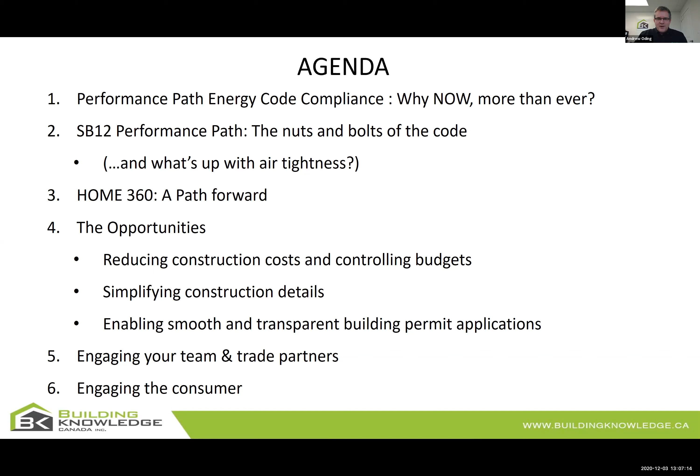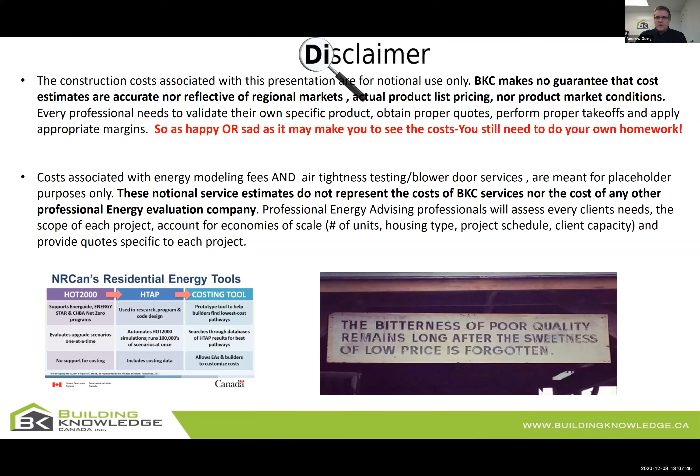So I always have to have a little bit of a caveat sometimes in these sessions. So just real quick, a little bit of a disclaimer. Number one, any of the construction costs we share with you today are notional. So as happy or sad as you are to see some of these costs, you've got to go do your own homework. The costs you see today are not representational of any specific builder cost. Again, they're things we've gained from our experience, and we have also used the Natural Resources Canada builder CBAT tool, cost benefit analysis tool, to do some of the costing, and that's a tool that we've often used with our builders.

So you all know what it's like. We don't need to tell you how things are. We've got construction costs that have gone up exponentially. We've seen costs of somewhere in 10 to 15,000 or more per home, just simply based on your panel and your wood type things. We've seen that the codes are getting incredibly complex. Our building permit applications are complicated for everyone, and our consumer expectations are growing absolutely exponentially. And that's, of course, thanks to all those great television shows on HGTV where perfect homes are built in 36.5 minutes minus commercial time by people in clean brown overalls and clean white shirts.

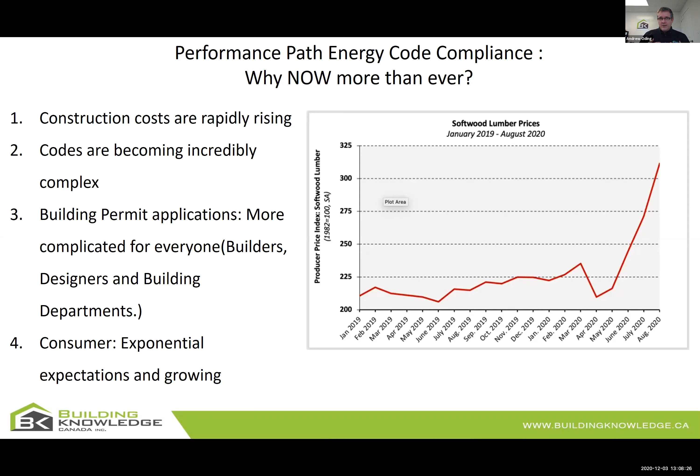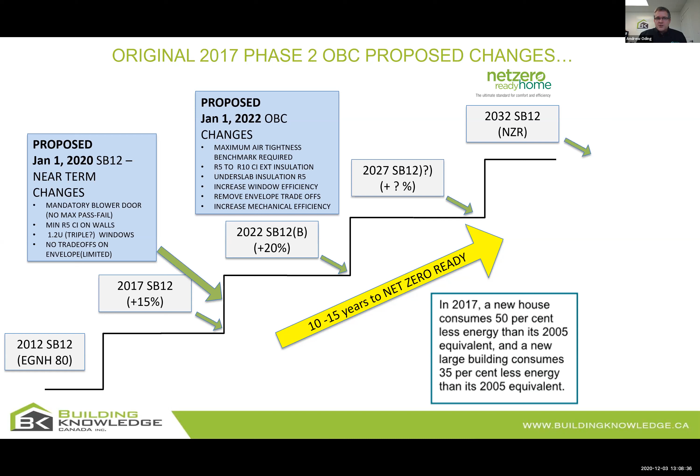So many of you would have remembered slides like this from 2016, 2017, and that was back in the day when it looked like the province notionally was going to be headed towards net zero, and there were these proposed changes. We all know that that is no longer the case. We know that for now, when it comes to the SB-12, there are no current changes tabled between 2019 and at least 2021. So you're good going into the next year when it comes to the SB-12.

The thing you need to understand, though, is that the Ministry of Municipal Affairs and Housing has embarked on a harmonization exercise with the other provinces, and they are looking at this thing called the Tiered 2020 National Building Code, which for your part would be Part 9. A lot of work has to be done yet. There is nothing about this that is a done deal. We would encourage you, particularly as builders and industry folks, get a hold of the Ontario Home Builders committee and get involved. It's one thing to sit back and let things happen, and then either we're happy or we complain about it later on. But the reality is you can get involved now and you can affect change for the better.

So we know where this tiered building code comes from. We know that it suggested that at some point we're going to have this national code that's going to lead towards net zero energy ready homes. One of the things we need to understand, and again, this is context setting, is that this national tiered energy code is about energy. It's not about carbon, and it's energy source neutral. It's not about electrifying the grid.

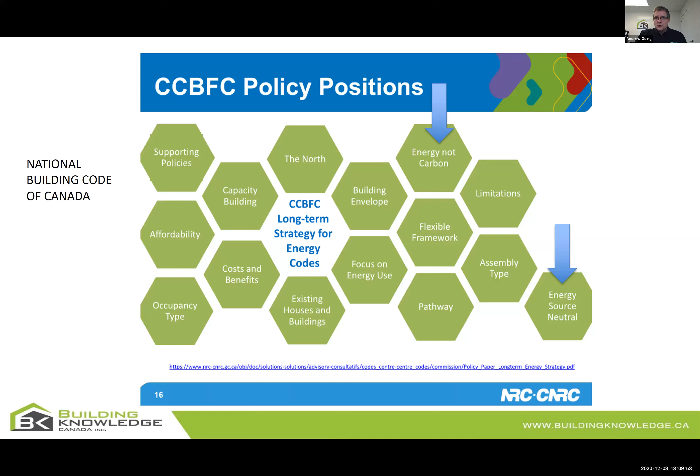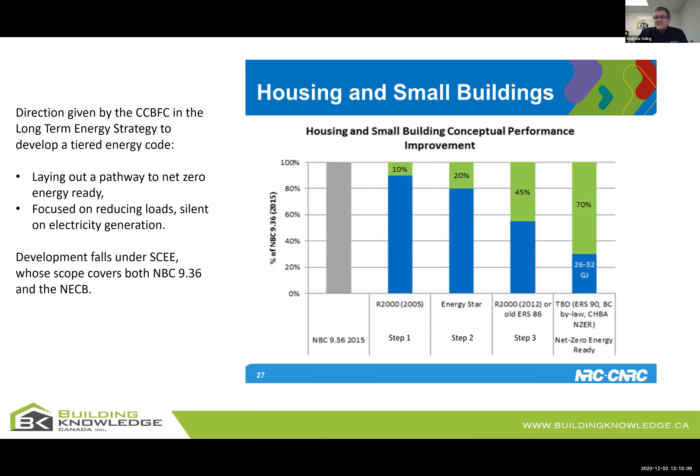Notionally, what it speaks to is, when it comes to houses and buildings, about a 70% reduction at the end of the day versus the original 2015 NBC, or what I would say would be about since the early days of the SB-12. One thing to understand is this National Tiered Energy Code is significantly different than the British Columbia STEP Code. There is no mandatory airtightness testing. There is, in fact, a prescriptive path, so you don't need to do energy modeling.

If you don't want to. So again, be careful of the myths, be careful of the things you hear on the street or in the industry, get the real facts.

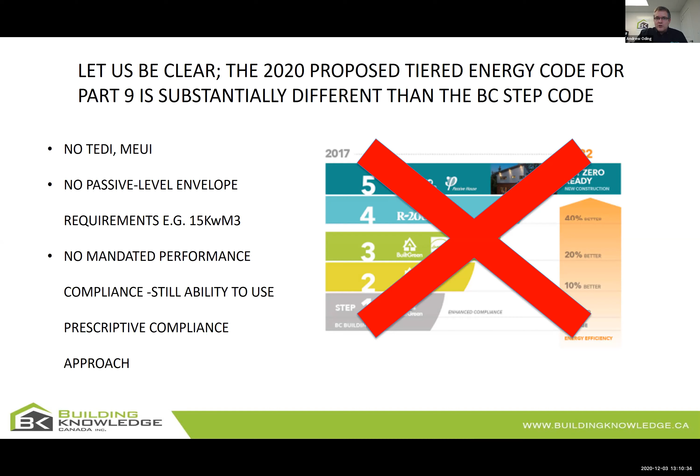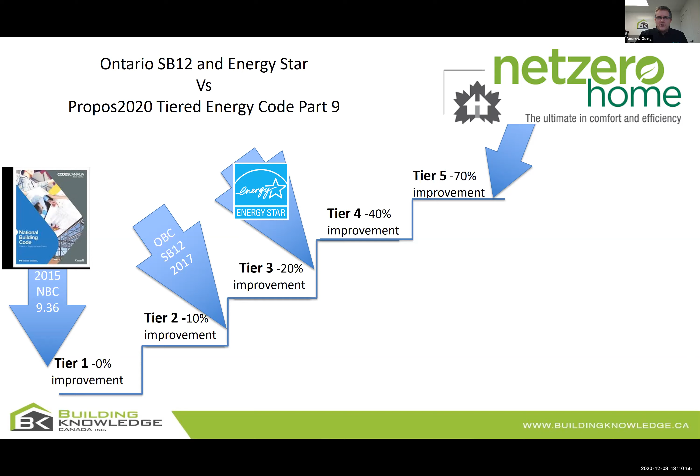What does the tiered energy code mean for you as a builder? Right now in Ontario, for instance, the SB-12 in Ontario notionally is approximately around tier 2 already. Those of you that are doing Energy Star are somewhere around tier 3. And those of you that are involved with net zero ready, net zero homes, you would be up around the tier 5.

A couple things just to set the target, because as we talk today, you're going to want to reflect on this to understand what you need to do to plan as a builder, because some of the things we're talking about today, you're not going to want to go out and do tomorrow. This is about a 1, 5, 10-year plan on how to move forward and why performance is really going to be the key to your future.

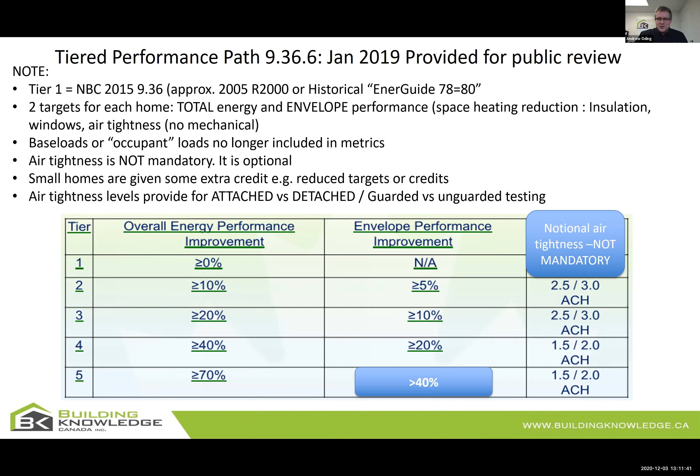A couple things about this tiered energy code. Again, air tightness is not mandatory. There are credits for small homes, so that's not denoted on this slide. There are 2 different metrics. One is an overall energy efficiency performance target, and the other is an envelope. So in other words, you can't just build a shell and put 20 acres of photovoltaics on the roof and call yourself good.

The other thing too is there are 3 ways to meet this, or will be 3 ways to meet this. One is prescriptive, pick your points like Energy Star, EnerGuide for new homes. You can use that if you want, or you can use any third-party energy modeling software you want, as long as it complies with 9.36.5 of the National Building Code and is aligned with Canadian codes and reference standards. So there you go. So it's complicated. You've got choices, you've got alternatives, you've got options.

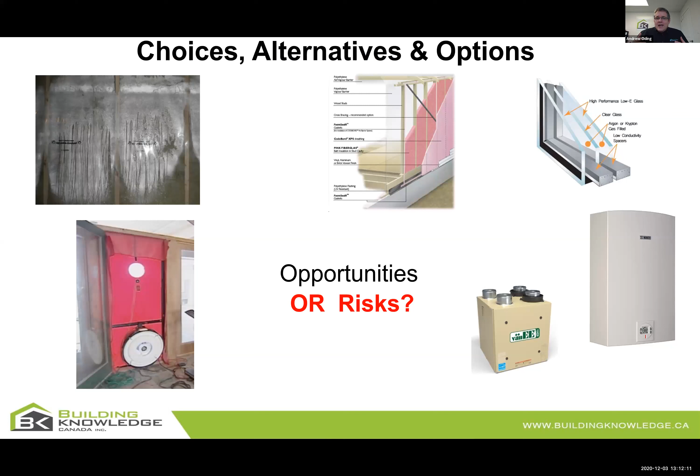Here's the problem. There are opportunities, but there's a lot of risks. And you have to be careful about what you choose in the name of energy efficiency, or you will end up with unintended consequences. We often say to our clients these days and others, if you are not ready, if you're not prepared to actually drain the rain on your envelope better than what you're doing today, in other words, flashing windows and doors, don't put a stitch of more insulation in your walls.

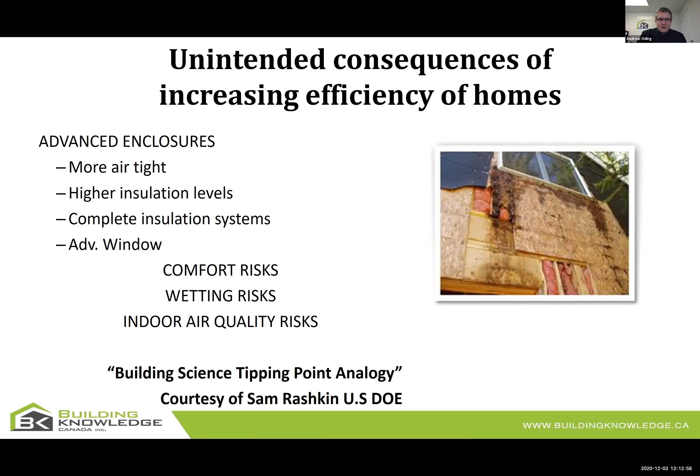Some of the reason I speak to this is just my background as a builder, and then growing up at an early age back in the 1970s when we had an oil embargo. And we had a crisis, and across Canada and in the US both, we had this drive to make homes efficient. And what happened was we had some of the single biggest envelope building failures that came out of that drive to insulate. We had the Canadian Home Insulation Program. We put insulation in and it caused attic rain.

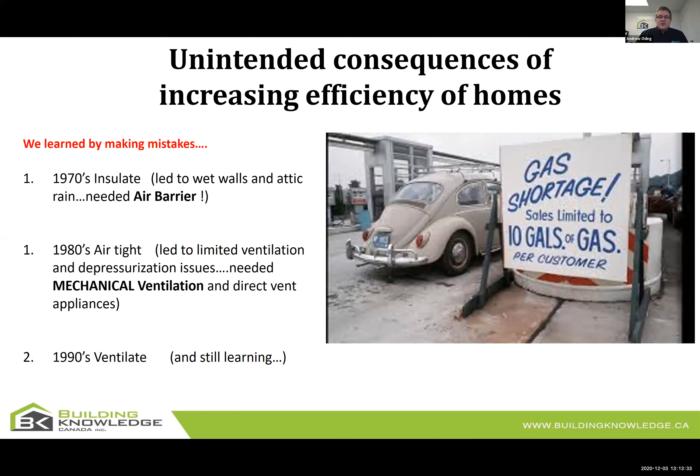So we pulled it out and put in an air barrier. We learned that again in the 1980s, great, you're airtight, but now you need mechanical ventilation. And then finally, we got that into the code in the 1990s, and we're still learning. So again, be very careful about making changes in the name of energy efficiency without understanding the implications of building science.

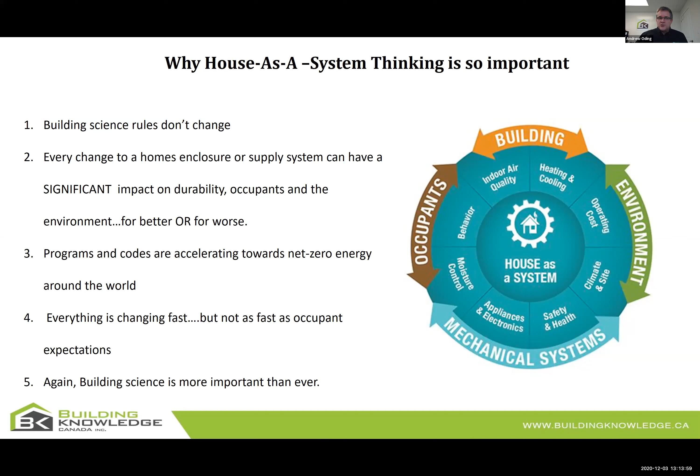So just notionally, use house as a system. It's a Canadian concept. It's been around for years. It's a very simple concept that one change in one element of the home is going to affect another for the better or for the worse. And again, be careful when we have programs and codes accelerating so quickly, unless we can use building science.

The other thing too we do have to understand is that the energy versus carbon, the choices are very complex. Right now we're talking about energy, but folks, the long-term gain is the reduction in carbon. Chris Magwood, a good friend of ours, Chris is doing some phenomenal work at the Endeavour Centre. Go look him up. He's doing a lot of studies right now.

He's developing a carbon tool that he's helping others like ourselves learn how to use, so we can actually look at embedded carbon or embodied carbon on a home. A couple things to keep in mind. If you're not careful, you can take a passive home or a net zero energy home, stuff lots of insulation in with fancy mechanicals, but the reality is the home will have to operate for 400 years to offset the embodied energy that went into those materials.

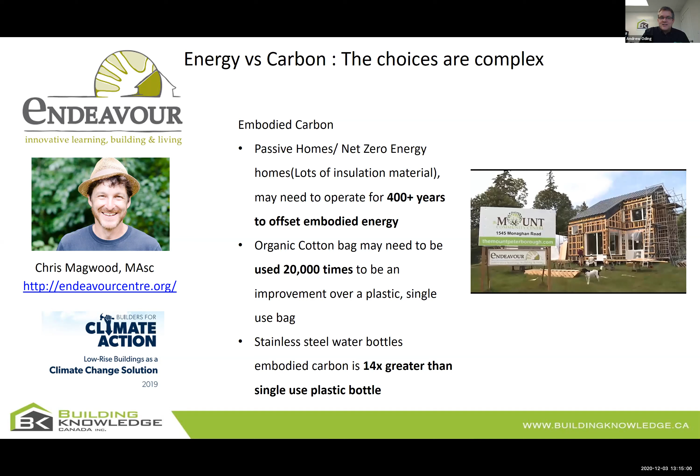You know, it's like the old story Chris tells, the organic cotton bag. It sounds great, you feel green. The problem is it needs to be used 20,000 times to be an improvement over a plastic single-use bag. So again, some of these things we do have to be careful of. And when we look at total global emissions, the embodied carbon almost matches the operational carbon.

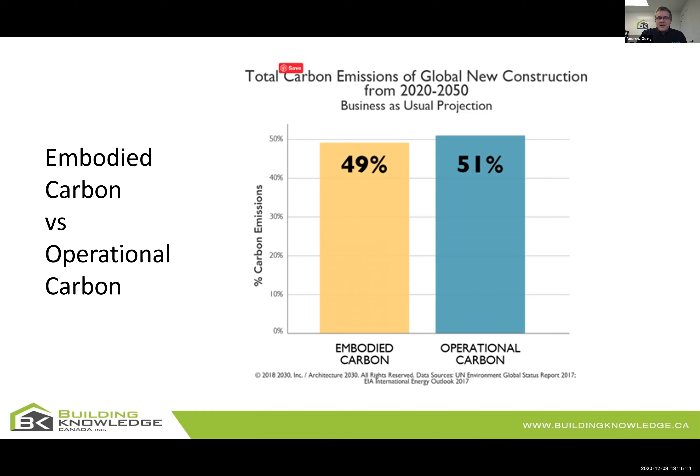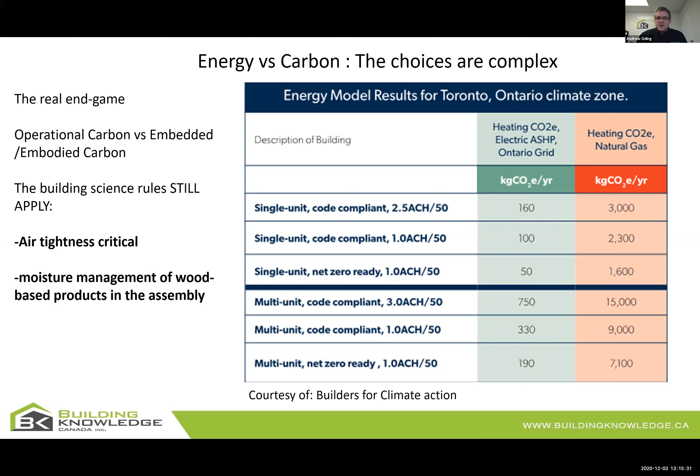Now, that said, the building science still stays the same. At the end of the day, even when we move beyond energy into carbon, you're still going to find that things like air tightness are still incredibly impactful on lowering carbon. And you're also still going to need to be very careful about moisture control in walls and dew point, because you likely will be using more wood-based products or things like that.

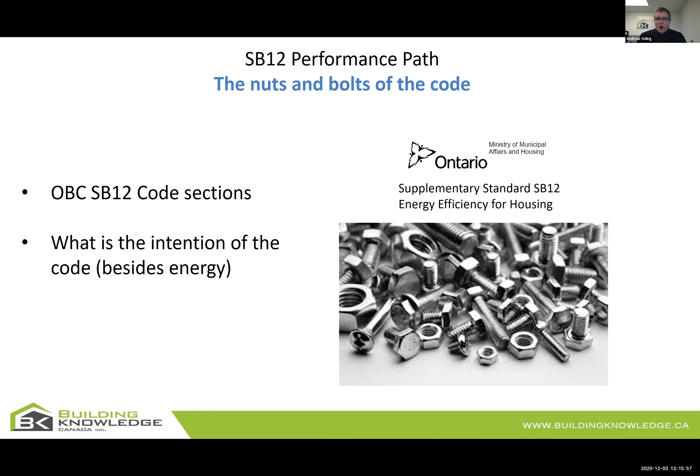Okay, let's talk about the building code, the nuts and the bolts. We're going to talk about the SB-12 code sections, and we're going to talk about what is the intention of the code besides energy. Because remember, before there was energy in the building code, there are life safety standards. In other words, we cannot do things to homes that will harm the occupant or put them in a position of having health implications.

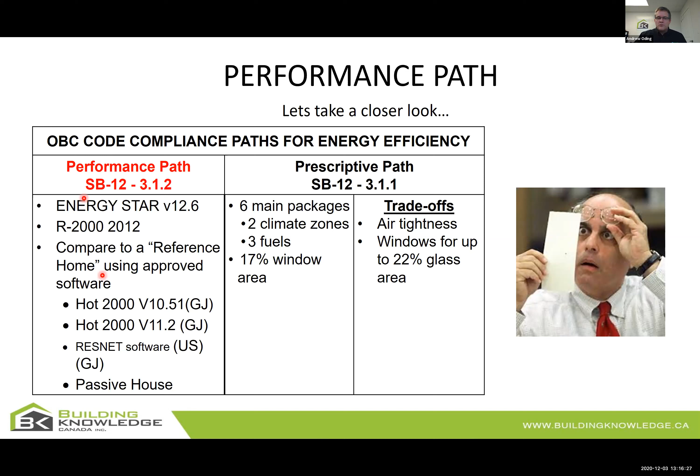So here's what we have in the SB-12. We have the 3.1.1, which is in fact the prescriptive part of the building code. We today are going to be talking about 3.1.2, which is the performance. And within performance, you have the programs. The only volunteer programs recognized under the Ontario Building Code are in fact Energy Star and R2000. And then you have the modeling protocol to do the reference modeling and some of the softwares that you can use, and we'll talk about that later on.

So the Ministry of Municipal Affairs and Housing, I borrowed this slide from a couple of years ago when they came out with the 2017 reg, and I thought it was very informative. They shared with the industry that there were three things they were trying to do with the SB-12: preserve and reinforce the envelope, encourage air tightness and blower door, and prepare the industry for movement towards net zero like housing.

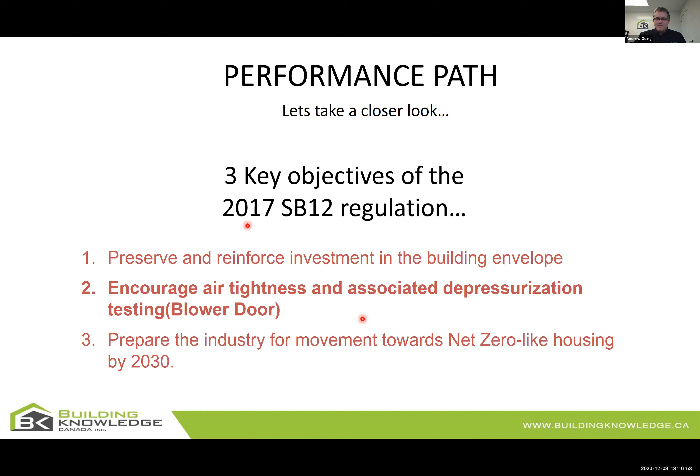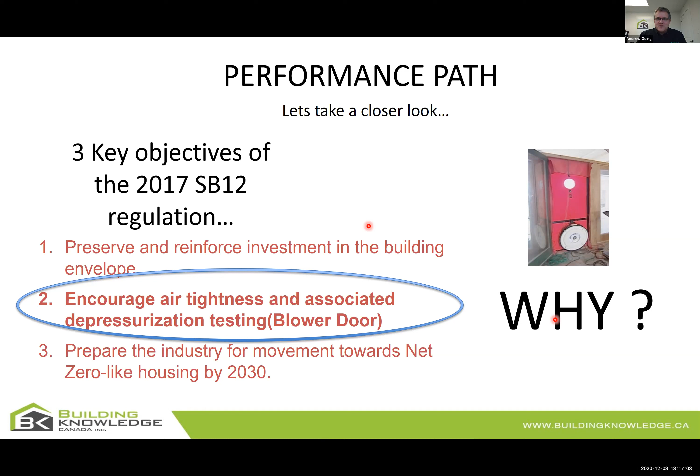What I want to do is focus on this one. Why did the regulators, why is it important from a building science standpoint, from a health safety standpoint, that air tightness was starting to be encouraged under our SB-12? So I'm going to show you. I'm going to send you these slides, but I'd like you to read this. This is the explanation of why air barriers are in our building code.

And here's the problem, folks. Today, when we talk about air tightness and blower doors, we all get caught up in it's energy efficient and it lowers the energy, and it does. But that's not why we have air barriers in the building code. The reason we have air barriers in the building code is because air leakage, only second to rainwater, is the #2 destroyer of homes in Canada.

A week and a half ago, I pulled a bunch of mushy wood out of a house that I had constructed almost 20 years ago. And a lot of it was due to poor air barriers. We see this happening in attics. We do forensics. We see attic rain, and it's because of poor air barriers, not lack of venting. And remember, the reason air barriers went into the codes in the early 1980s, late 1980s, was because we couldn't let moisture get into the envelope.

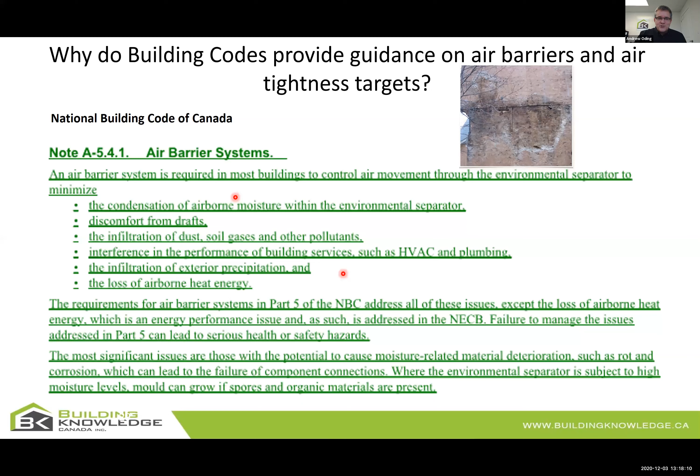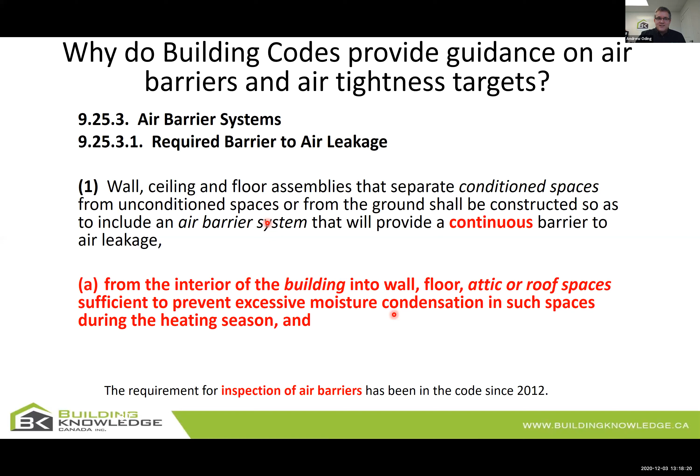Here's the description in your building code. Here's the reason why we have to have air barriers: to prevent excessive moisture condensation in such spaces during the heating season. This is what happens when you don't have good air barriers. Again, I don't think I need to preach to the choir. We all get it. And folks, we are seeing it happen in a rush to make highly insulated envelopes, but we're not tightening the building envelope down for air tightness.

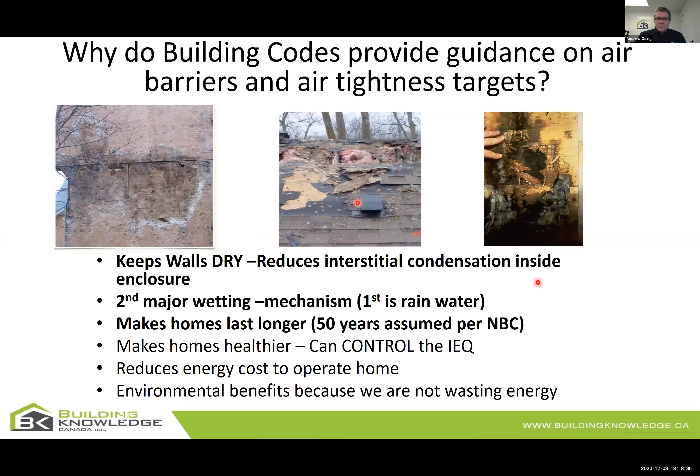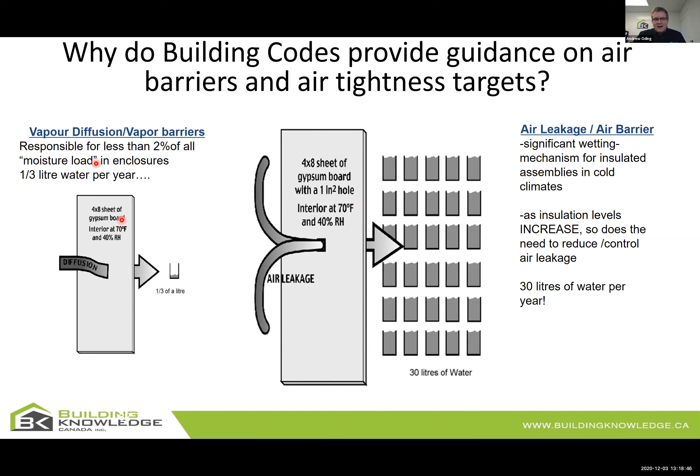The big one that wets walls is in fact air leakage. Now, here's what I call the forgotten part of the SB-12. Many people have forgotten that this was actually in the prescriptive section. And this was where the Ministry of Municipal Affairs and Housing said, you know what? We need to encourage air tightness.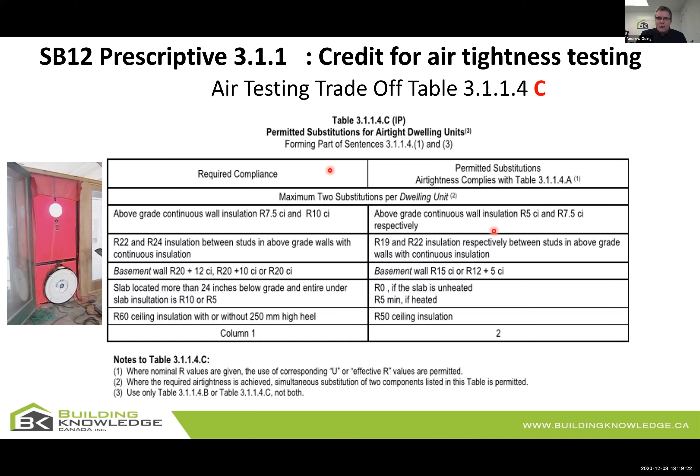In fact, without doing performance or energy modeling, if you just simply air test the home and meet 2.5, you can start to degrade or pull down or optimize other elements of the home, because air tightness is more impactful and more helpful. You'll see there were things like this. Just by doing an air tightness and meeting 2.5, you could reduce furnace efficiency and you could reduce basement insulation.

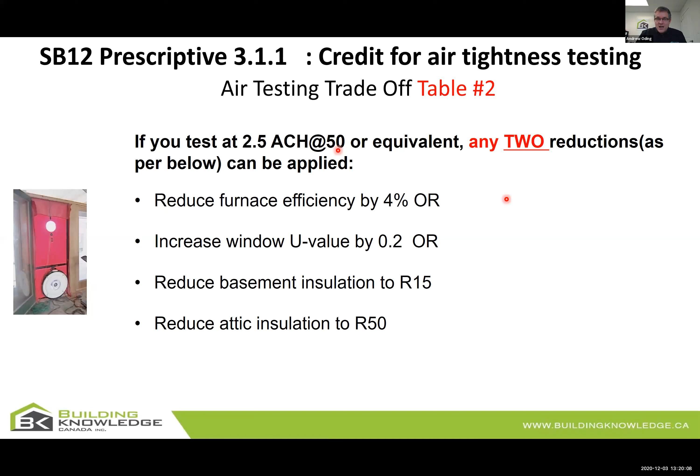How useful is this? Well, go and ask any architect or designer how easy it is to design a thin, narrow townhome and to have to fit a stair next to a common wall and get R20 continuous between the stair hole and the wall, when you already are limited between the stair hole and the garage wall by limiting distance. That's a big deal. We've seen builders have to go in and put spray foam there just to get their R values, and that's a design flaw. So what difference does it make if we can actually lower the amount of insulation and it has limited to no impact on the amount of energy that's lost, but it allows the design to take place?

Again, this is in the prescriptive part of the building code, 3.1.1. It's actually identified on the EEDS form for prescriptive. It simply needs to be acknowledged on the EEDS form. You simply need a blower door test when it's done to be validated by a company like ours or a good registered energy advisor, and you're done.

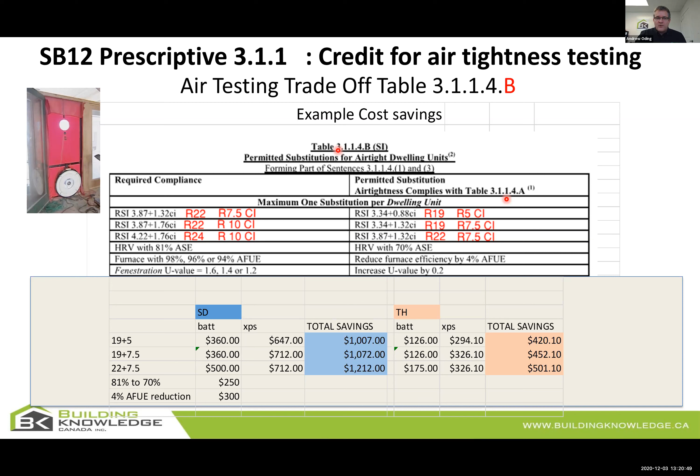So let's get back to performance path now. There's prescriptive and then there's performance. Here were the differences in 2017 when it came out. Number one, all of a sudden we had to put drain water heat recovery into prescriptive. All of a sudden we had effective R values. All of a sudden we didn't have that many trade-offs anymore. Now it was only air tightness.

With performance, there were some pretty significant things that got changed. One was we went to a gigajoule metric. No matter what the software was, we had to show an energy reduction based on a metric of energy, gigajoule. Not talking programs, just talking metric. The appendix of the new SB-12 started to inform us as to what are the base assumptions that the energy modeling professional has to use. And this is something you need to be aware of. Regardless of what software you use, you had to use some baseline assumptions.

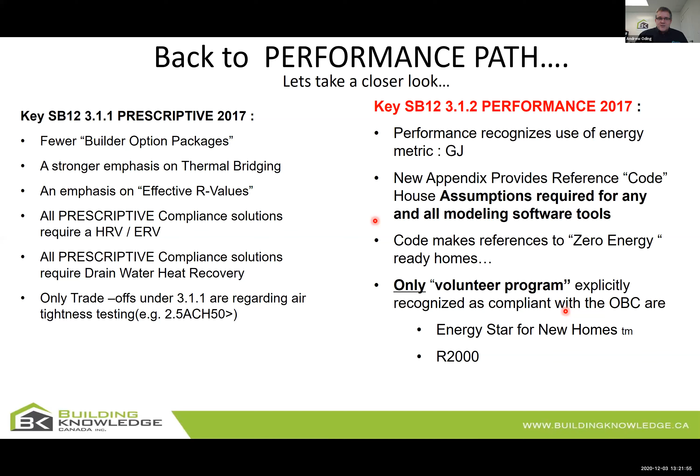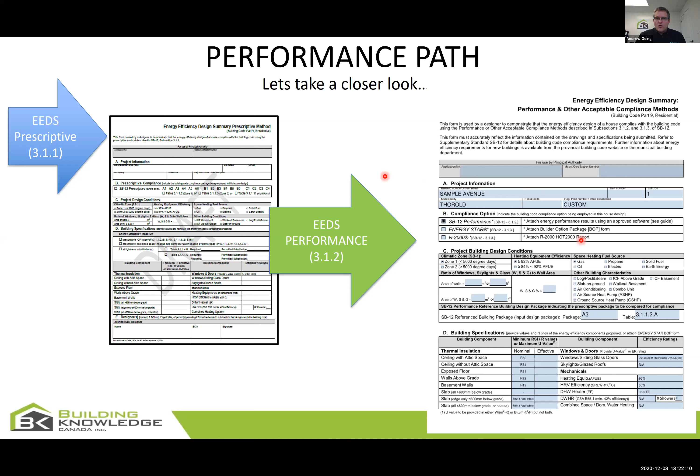And the other thing to keep in mind is that the only voluntary programs that were suggested in here were Energy Star and R2000. Again, it didn't talk about LEED, it didn't talk about Greenbuilt, it didn't talk about any of these other programs. It was simply Energy Star and R2000. So to understand how this works, there are two different EEDS forms. One is for prescriptive, the other is for performance. And these can be available from your building departments, but they are two separate forms. And we're going to talk a little bit more later about how these forms are filled out.

So when it comes to performance path, what we're really talking about is a better home for less cost. And at the end of the day, giving your client a home that works while you're able to optimize the affordability of the home. So here's your 3.1.1. Everyone likely likes to use the A1, and why is that? It's the only package that doesn't have continuous insulation in it.

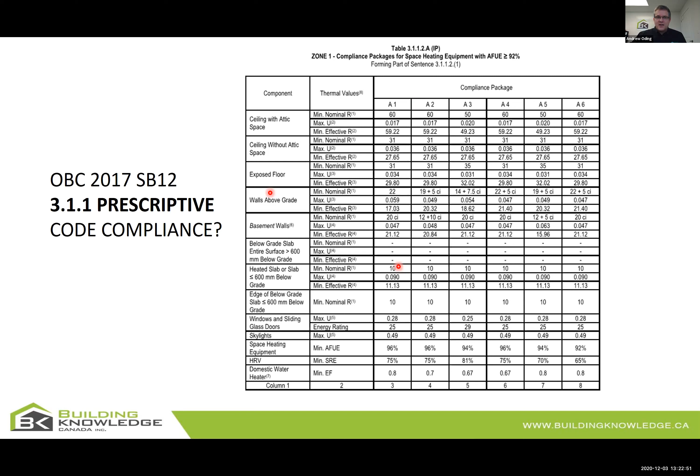And one of the other things that throws these packages off is a lot of the other items on here, the equipment that has to be higher efficiency, are often rentals. And so it changes the game and the way we put our packages together. But what we're talking about today is let's get away from prescriptive and let's move on to performance. So here's the process that we use and that a good energy advisor will use to get you on a performance package.

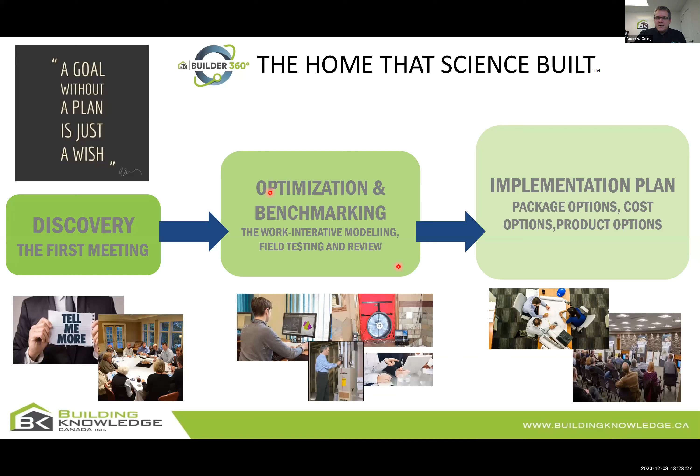Number one is there's always a discovery concept or conversation. We need to learn some things. Then we want to get into the field and see how your homes or buildings have tested in the past. We want to have some discussions. We need to do some modeling. We need to do some assessments. And then we come back with a plan. And really what it looks like is a little bit something like this: getting to know you, doing some optimization, and at the end of the day, implementing some of these things.

During the discovery phase, you need to outline what are your goals. Is it to save money? Because if that's what it is, then let's work towards it. Is it to meet a voluntary program? Let's understand what that means. Or is it to meet a regional program? Some municipalities have some tiers that are in place. Toronto Green Building Standard puts an incentive in place with their DCs that starts to encourage higher incentives or higher ranges. What does that mean for your homes? And again, other goals to look at.

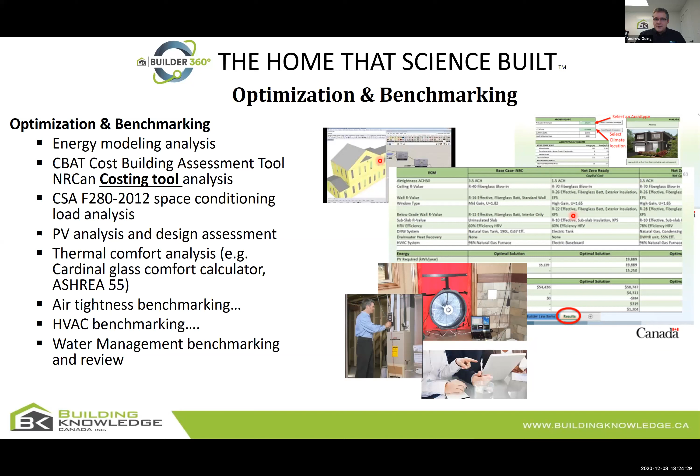A lot of work can go in behind the scenes. This is when we take your plan, we take your product, we go away and we do all sorts of analysis depending on what your needs are. We use costing tools as well. What you're looking at here is a picture of the cost building assessment tool that Natural Resources Canada has developed. And we're able to look at general cost for different equipment and different options on the home, structural and enclosure options, to come up with a notional cost that can then inform you as the builder as to the difference it can make to your budget.

We also start to look at the difference some of these things will make with your mechanical design, and also facilitate ease of design on the drawings. At the end of the day, it all comes back to an implementation plan. And typically with these optimizations, you start with code and then you move to whatever level above code, or just meeting code, you want to be. And then we at Building Knowledge always like to show you, regardless of your goals, what it would mean to be Energy Star or net zero ready. You're going to get that from us all the time, just so you understand what potentially in the future your homes may need to look like.

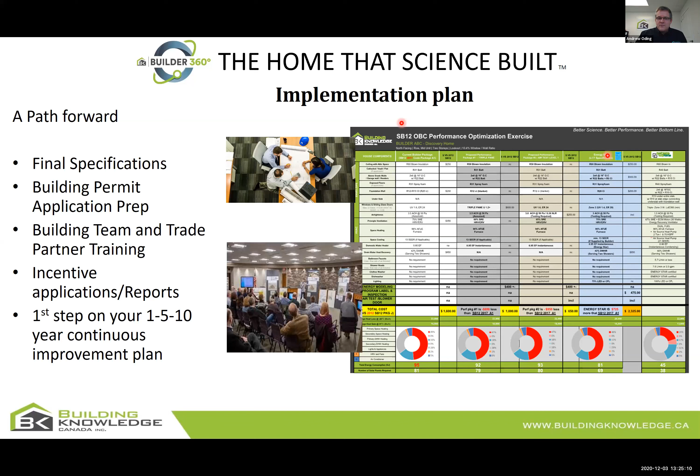Okay, so let's dive into some costing details. A couple things to understand. Is A1 really cheaper? And the answer is no. In fact, it's not that much simpler than performance, and it isn't cheaper. And there's four main elements we're going to talk about today. One is multifamily. The other is mechanicals when it comes to combos. We're going to look at what the opportunity is with air tightness, and we're going to talk about windows.

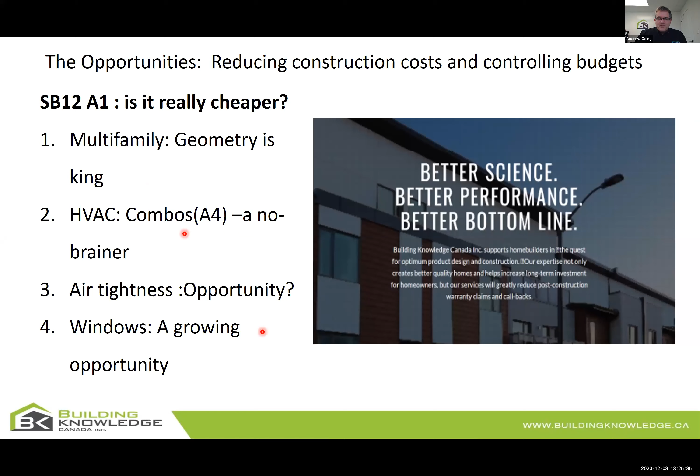So in general, we have found on average with our clients that when it comes to performance, there is about $500 to $1,700 per home savings, depending on the geometry, depending on the product type. And that includes any fees associated with the modeling, if there's testing or whatever else. This is like money that's left on the table. And the beauty of it is it can be done. You can actually increase the performance while decreasing the cost. And it can be done either with testing, blower door testing, or without.

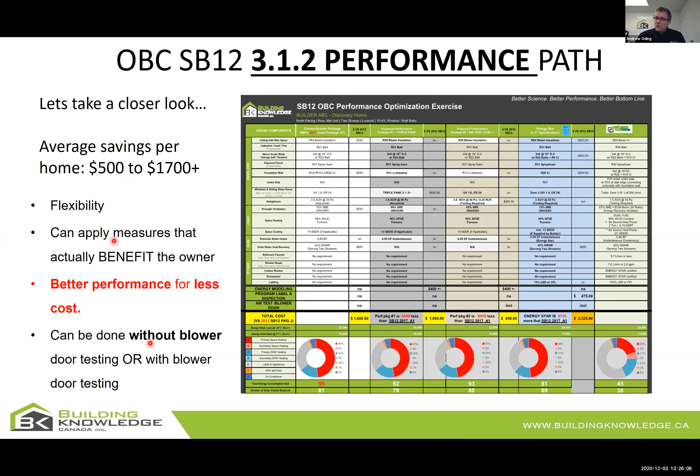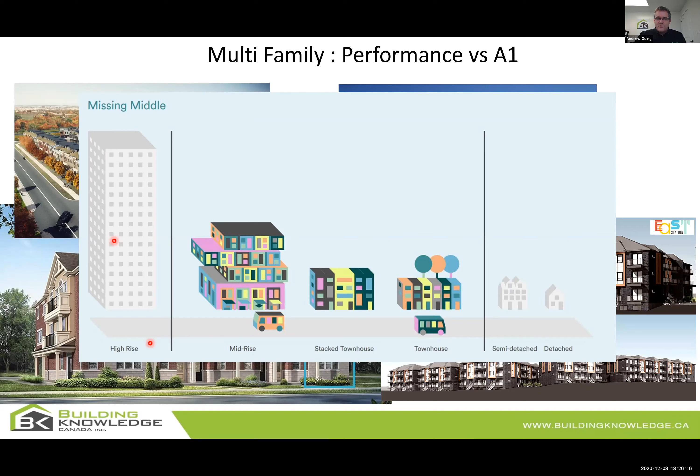One of the areas that we find this is incredibly beneficial is with the multifamily. It's this thing called the missing middle. This is about 70 to 75% of the market that we're seeing out there right now. So here's a really simple example of a typical attached townhome. And this was an analysis that was done. And in the townhome, we were able, without doing any changes, with no air testing at all, just a simple model: drain water heat recovery was pulled out. The attic insulation was reduced.

Remember, it was a small attic, and it makes a hill of beans difference whether it's R50 or R60, even to the thermal comfort of the occupant, or over the next 50 to 60 years. Remember, to cut a heat loss in half in an attic, you actually have to double the R-value. So when we're getting to R50, we're starting to bump up against the law of diminishing returns. The geometry of the unit is also efficient. With multifamily, you have common walls, you have less exposure, you have fewer windows in some scenarios. And again, the geometry itself lends itself to a more efficient form. And this is nothing new.

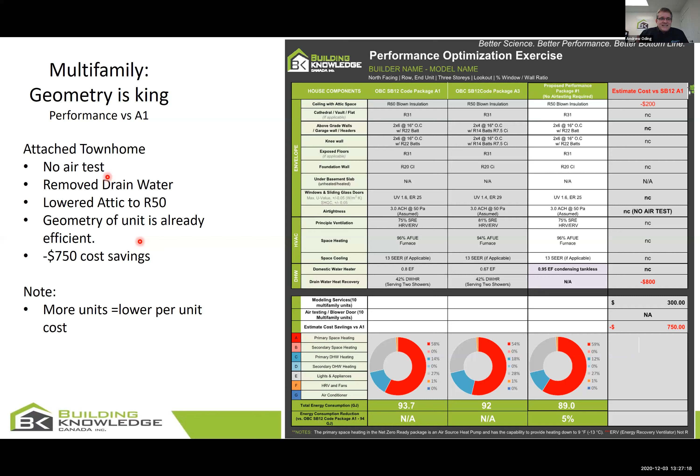I remember architects talking about this in the 1970s and 80s. So to give you a closer up here, what happened was at the end of the day, we pulled down the attic insulation. They took that out. They took the drain water out, and including the modeling fees, again, and these are just notional, just as a placeholder, but at the end of the day, it was a $750 reduction per unit cost on a site of 10 or more homes, and you can add that up as it expands.

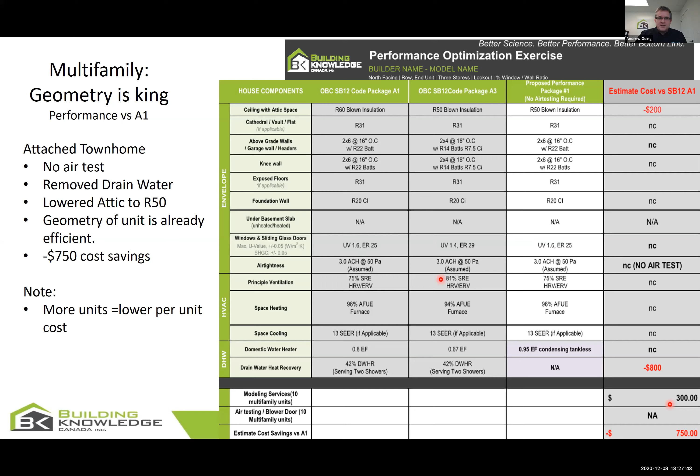The other part I want to talk about is air tightness. It's not a matter of if, it's really a matter of when you're going to get to the point to consider air tightness. A number of builders, even production builders, have started to see the benefit of this. Some of Canada's largest, best performing builders do air tightness as a standard. They see it as a quality control measure. They also see that it gets them along the road with performance and saves money on the cost of the home meeting the energy code. And they like the results it delivers on the site. But again, it takes a special relationship with the evaluator to make this happen, but it absolutely can be done.

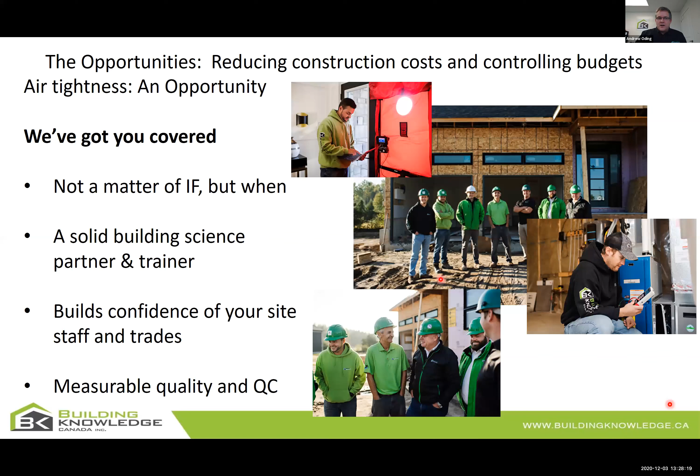Let's talk about air tightness. So here's the sample project that was done. And what this is showing is that in this case, again, we'll take a townhome, air tightness was done. So a blower door test was done. They achieved the level of air tightness. So it was 3 air changes that was achieved, which is very achievable from a multifamily perspective. The attic insulation went down, drain water came down. They wanted to reduce the basement insulation, again, because of the stair hole implications, to give room for the design to happen. Also, the geometry lent itself, and again, all told, it was $1,000 per unit.

Now, let's look beyond the savings and look at the total effect. One was this construction team is now prepared for the future of building codes. Number two is because of the better air tightness, they were actually compartmentalizing the units, which resulted in a decrease in sound and odor transmission between units. Just so you know, when we blower door test units across Ontario and across Canada, you can ask any registered energy advisor this, we find that about 30%, in some cases 40%, of the air coming into the unit when the blower door is running is coming through the common demising walls when it's a 1 hour wood frame staggered stud assembly. They gained the stair space back.

They were actually able to reduce some of the heat loss and heat gain loads, which led to a smaller, more compact mechanical selection. The home got quieter. There was better thermal comfort. And again, unit upon unit, this added up to a substantial cost savings.

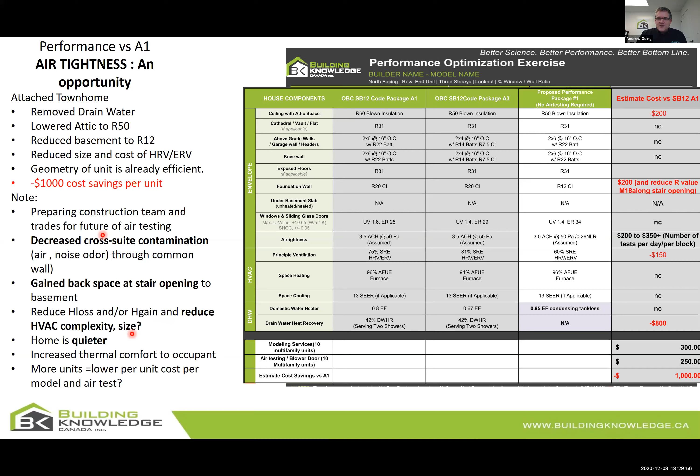Let's jump to windows. Again, windows, are they friend or foe? One thing I think we do understand is that we are seeing a lot more glass. And we have seen a lot more glass happen in the last several years. Our window to wall ratios are going up from before 2000. We're now seeing window to wall ratios on homes of 17 to 20%.

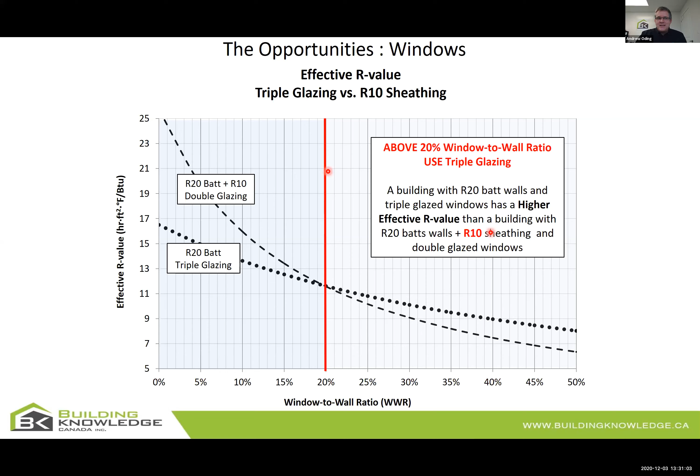Here's what happens with that. As the window to wall ratios go up, if you were to take an archetype of homes from across Canada and Ontario, what you'll discover is that because we have so much more glass now, when you get between 15 and 20% window to wall ratio, if you were to put in a good window, let's say a window of 1.2 U value or less, which would be like a tri-pane, it adds an overall thermal effectiveness to the entire envelope that exceeds what would be added if you had added 2 inches of foam to the wall. That's pretty informative, and that's pretty helpful. Again, it's not saying you wouldn't add continuous insulation at some point, but the window opportunity may take place before that.

The thing you have to understand about windows too is that there's 2 ways to meet the building code. One is through ER and one is through U value. And folks, I don't think I need to say too much about this, only that even though both these windows are deemed to be efficient all the way up to the territories, the reality is they're 2 different windows. One window is complying on U value, which is here, 1.1. That's the insulative value of the window and its resistance to heat loss and heat gain. The one on the right is ER, energy rating.

Energy rating is an old factor that includes the U value. It looks at air leakage of the window, but more importantly, it weights solar heat gain really heavily. What you have here is 2 identical windows as far as Energy Star is concerned, zone 3. However, the window on the right, because it relies on ER, which relies on solar heat gain, has the propensity to raise your cooling load substantially.

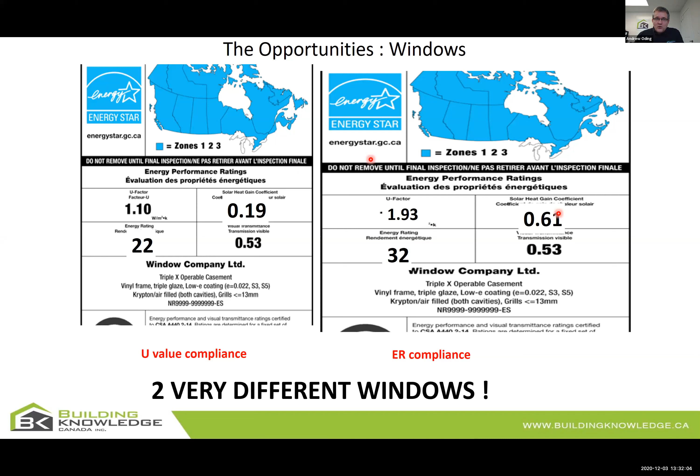In some cases, we have seen it raise the cooling loads by a ton to a ton and a half or more on a home. So be careful what you pick. And again, remember, air conditioning is the fastest growing peak load we have out there.

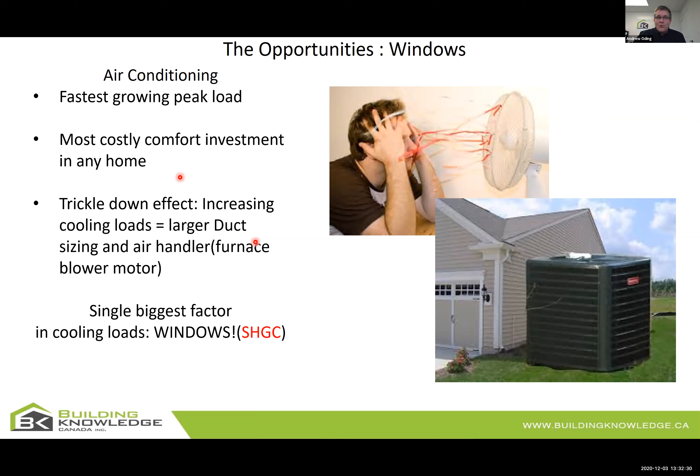If you choose windows with ER, just be careful, because what you might end up with is high solar heat gain, which means you're going to need a bigger furnace fan, which means your ductwork's going to need to be really big, and you're actually going to increase the cost to operate the home for the homeowner because it's going to be electricity.

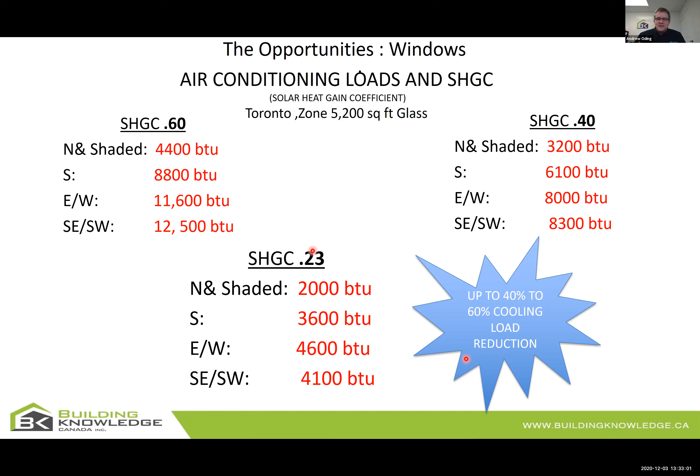And just to show you the difference between what solar heat gain can do, you can see here, by this example, that if you have a solar heat gain of 0.6, and we have seen windows in Ontario of 0.7, that's 12,000, 1 ton of cooling through a group of windows on south and southwest walls. If you go to just a medium range, it cuts it down almost in half. If you go to a low solar glass, it cuts it down to a third or a quarter. That's a significant difference just by looking at your solar heat gain.

Again, I'm not going to continue on that point, but let's just look at the windows when it comes to the exercise of performance. So here was a builder that had access on a townhome project to adopt tri-pane windows. It was a mid-density project in the city of Toronto. There were several hundred units, and they wanted to move from their 1.4 building code window, low E, double argon, to a tri-pane. And they were able to do it because it's a multi-family, little less glazing area.

They were able to do it for about $650 to $700 a unit, all in. That was a tri-pane single coat of low E. So what we did there is, there was no air test involved. The drain water came out. Attic insulation was slightly reduced, which, when we looked at the hip roofs and everything else, had very little impact anyways. And we were also able to pull out some of the other measures. I think that was it. At the end of the day, they were able to put tri-pane windows in the home and still save $850 a unit.

Now, here's the good news. These windows, which are tri-panes, can handle higher humidity, which means they can keep the relative humidity at 30 to 40 in the winter. They're not going to dry out. The hardwood floor is not going to blow apart. They're not going to have to wipe off the windows on a cold day, and you're going to have a happy camper. The other thing too is it will drastically affect heat loss, heat gain in some scenarios, which in some cases can optimize the size of the equipment that is in the home.

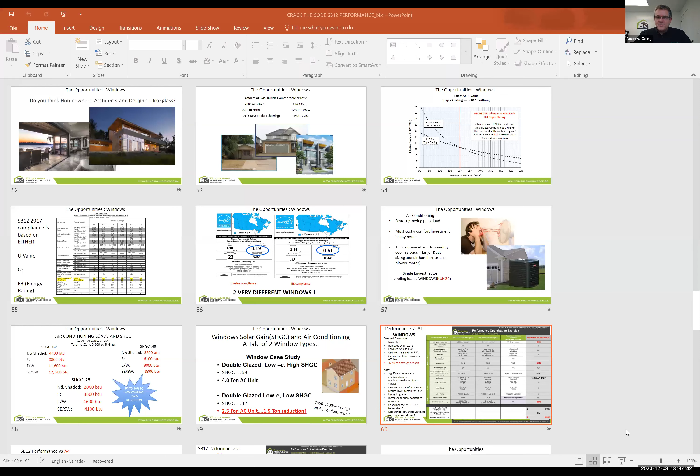colder. And that's where you have to be just a little bit careful, because with surface 4 low E, the condensation potential on that glass is much higher. So if you ever want to find out about what surface potential is on the window, you can ask any manufacturer, and they will have what's called the condensation resistance factor. You want to look for something ideally that is around, I'm going to say, 0.6 to 0.7.

So again, zone 5, wouldn't worry too much about it. But if you're going to be up in Sudbury or North, or you're out in Edmonton or Calgary, it's a little bit of a different concern. Now, if it's on surface 6 on a tri-pane, that's a different story. Hopefully that was helpful. Is that okay, Steph?

Yes. Another question that just popped in: doesn't the heat load go up if the solar heat gain coefficient goes down? How does the balance between heating and cooling annual energy look? That is an awesome question. So thank you. We have so little time today, but in our building science courses and when we do optimizations, we absolutely look at that. You're going to lower solar heat gain because you're worried more about cooling, because most of the mechanical systems in Ontario today are actually being sized on the cooling load, not the heating load.

But so here's what happens. As you lower the solar heat gain, yes, you could start to see your heat loss go up slightly. And this is where you've got to rationalize it. You've got to be careful. We often refer to this as the Goldilocks scenario, not too much, not too little. So to start off on your building, look at a better U value, try to look at 1.2 or less if you can. And then for solar heat gain, try a mid-range.

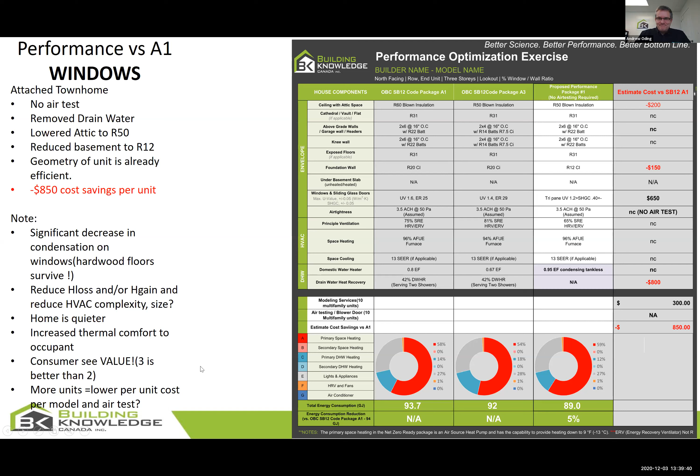So yeah, we'll leave you with that slide. So windows have become a really big option. Now I want to move on to SB-12 performance when it comes to combos. The reason this is an important conversation is because as we build more and more multifamily units and the loads start to diminish and our utility rooms get incredibly small and we're jamming equipment in there, it does make a lot of sense to have a single heating source for the domestic hot water and for the space heating.

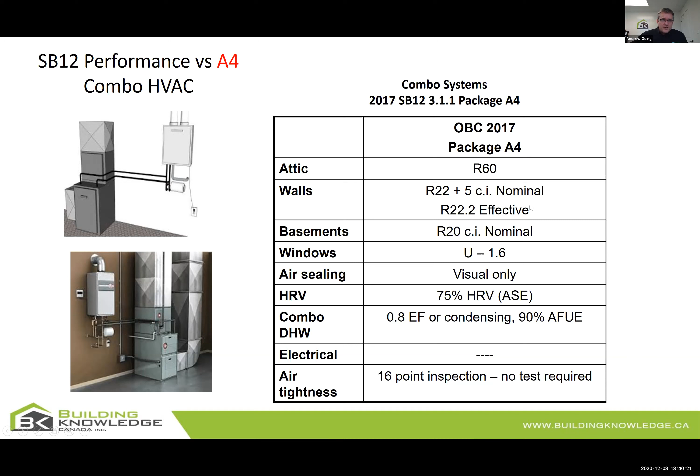However, you all know that under the Ontario Building Code, under prescriptive, if you use combos, you have to use package A4, which is a fairly aggressive envelope. And there's lots of reasons for this based on the modeling when it was done several years ago. And what we're finding is when it comes to combos, it is an absolute no-brainer that you would start to bring on board a performance path metric.

Again, even without air test, compared to A4, what you're going to find is that the envelope can be reduced. A4 right now requires continuous R5, which is a good thing, but in multifamily, sometimes it can be tough, so an opportunity to reduce. And here's what the builder did. Per unit with a combo, it was a $950 savings per unit. And that included a notional air tightness testing fee and notional modeling for this project.

Now, the thing to keep in mind with this on the note over to your left is that when we talk about removing insulation on the outside, I challenge this notion because sometimes it costs less to pull the insulation off. But those of you that are responsible for pricing right now on contracts and purchasing know darn well that the cost of OSB has gone through the roof. And guess what? It's actually cheaper to move back to a foam plastic or a continuous rigid insulation, as long as there's bracing and lateral support in the wall, than using OSB.

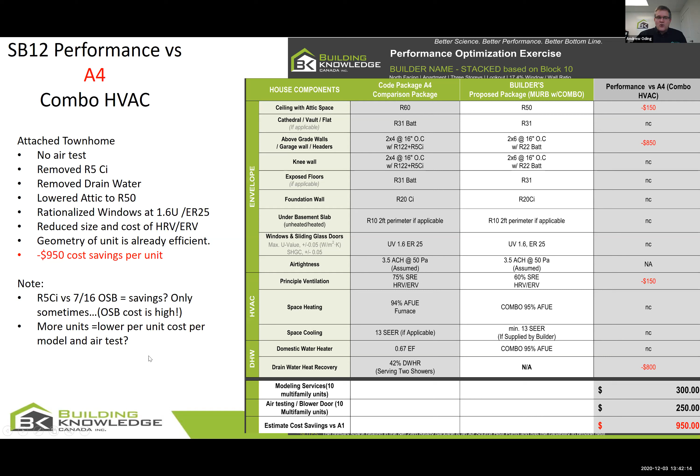And here's why. The panel goods of OSB and lumber are very much commodity driven and the market reacts very quickly, whereas with the foam, it doesn't react that quickly. Now, that said, I would caution you to pull the OSB off the wall. It can be done, but you need to know your structure. You need to know the wall. You need to know what your lateral loads and resistance are. Talk to the APA. Corey McCambridge, great guy, can help you with this and can help optimize your home in ways too. So again, an option that you can do, just do it thoughtfully and do it carefully.

So again, when you go through the Home 360, the Builder 360 optimization suite, you can look at all different types of options as you move up the curve, and it sort of gives you a path forward. And what we typically find, I want to draw your attention to the right side of the screen there, is that builders and our clients, when we get them into performance or performance with air test, it's like a first step towards this better built home and product.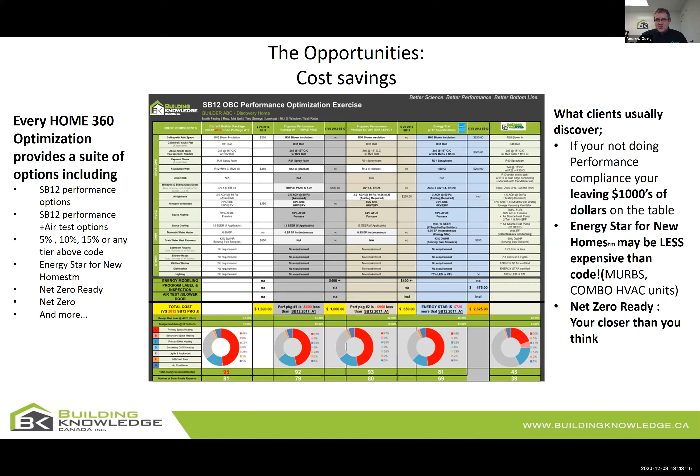And what they often find is that, guess what? Energy Star, in particular on multifamilies, in some cases is cheaper than A1 or cheaper than A4 when it comes to a MURB. So do your homework, sharpen your pencil, have the conversations, sit down and hash it apart, and you'll come up with some pretty compelling figures at the end of the day. And then the other thing too is we would never encourage anybody to move to net zero right away, but just understand that you're closer than you think. So make it part of that 1, 5, 10-year plan.

Let's talk about application documents. One of the things that we have found is that you need to have clear building permit application documents. It's incumbent on Building Knowledge Canada as a registered evaluator to take on the responsibility to make sure that we provide proper files and modeling and professionalism and knowledge in the report to the building official. The plans examiners and the building inspectors have a lot on their plate. We love to have conversations with them. Angela and our team spend a lot of time talking to these folks because there are a lot of questions. It is complex, and again, we're here to help.

And that's the thing we would encourage is clear reports. And also, as a builder or industry member, look for recognized energy professionals, professional third-party validation, and correct tools and software. Let's look at each of these individually. When we talk about clear permit applications, we need robust reports that can go along with the unit or with the block or with the project.

Also, the energy advisor needs to take responsibility for signing the performance EEDS form, not the BCIN. The BCIN still has to take responsibility as a qualified designer, but you'll see here that under this area, performance or Energy Star or what have you on performance, this is where the qualified performance energy modeling professional puts his name, company, and the evaluator rater license. What this is referring to is the qualified registered number that they as an evaluator have with the government of Canada. What this is doing is taking risk away from you as the builder, and it's taking risk away from you as the municipality that's accepting the permit.

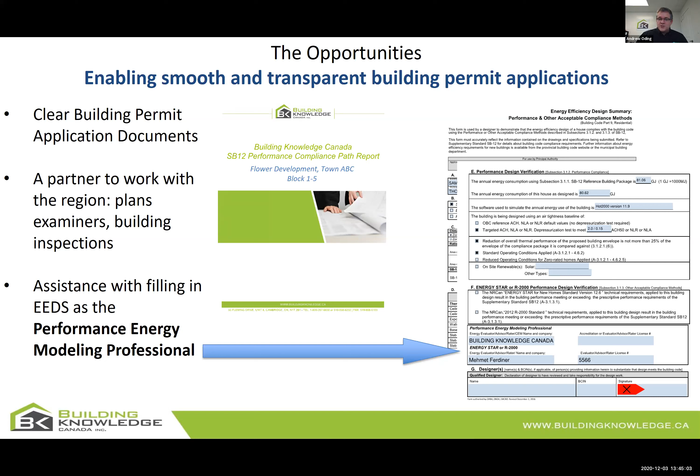How do we apply when we start to have homes that are not just single detached? One-off, one report, proposed versus reference, explanation of what's being targeted, all the details and the specs figured out. However, what happens when we get to multifamily? When there's multiple units based on iterations of plans? What happens when we get to blocks?

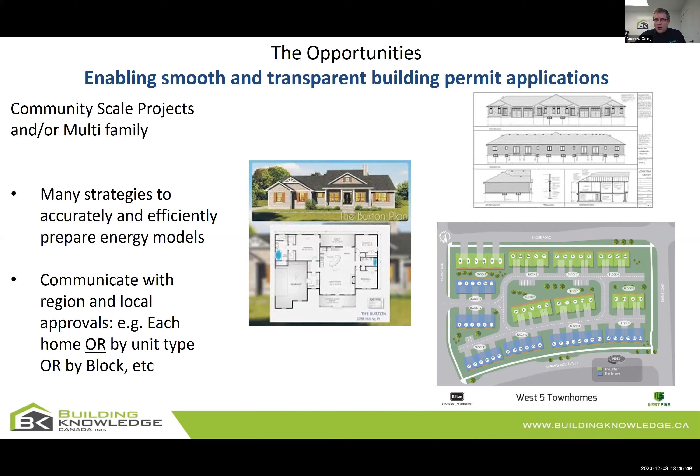And that's where we would say you need to understand what the region's goals are, what's their experience with applications under performance. And that's something that we as Building Knowledge take on so that we can have a conversation so that at the end of the day, we can provide them what they need so that they feel comfortable, but we can also do it in a way that's efficient, that also looks at reducing costs or optimizing the modeling process.

The other part aside from the process is the individuals who do it. And what do you look for when we start to look at validation professionals? A couple of things to look for: Natural Resources Canada, the Registered Energy Advisors, talks about who they are, what their accreditation is, what their test requirements are, their exams, the retesting every 3 years, all the professional conduct. The other place to go is the Canadian Association of Consulting Energy Advisors.

There's the website. All across Canada, all across Ontario, 100+ members strong and growing rapidly, are registered energy advisors and professionals who can do this, and they abide by professional conduct. And so these are the individuals that you're going to want to deal with.

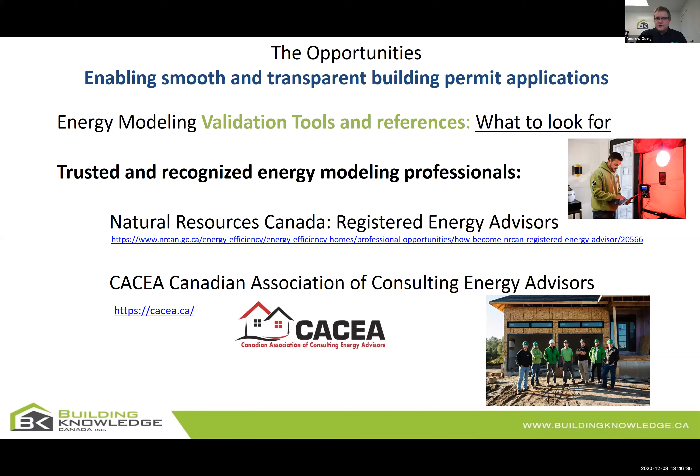When it comes to software, lots of discussion these days about the software. I'm just going to draw your attention back to what is in the SB-12. Again, in the SB-12, under performance, in the appendix, it talks about the parameters that have to be set in the model. And it talks about the assumed operating conditions, and those operating conditions are directly out of the EnerGuide rating system. You can apply those conditions onto their software as long as whoever's doing the modeling is accredited, as long as they have a professional designation and you have confidence in them, but it is based on the EnerGuide system.

Currently in the SB-12, when it references the appropriate modeling programs, it talks about HOT 2000, it talks about any RESNET software, which could be things like REM/Rate, Ekotrope. There's several others that are available. But again, any of these can be used as long as they use the reference conditions set in the building code.

The other thing too, I bring to your attention, we have been challenged, and rightfully so, that depending on the software that you use, some of the software uses US-based algorithms, whereas software such as HOT 2000 and others use Canadian-based algorithms. So you may want to look at using software that references things like the Alberta infiltration methodology, which has been around for years. It's actually much more robust than what is used in some of the US softwares.

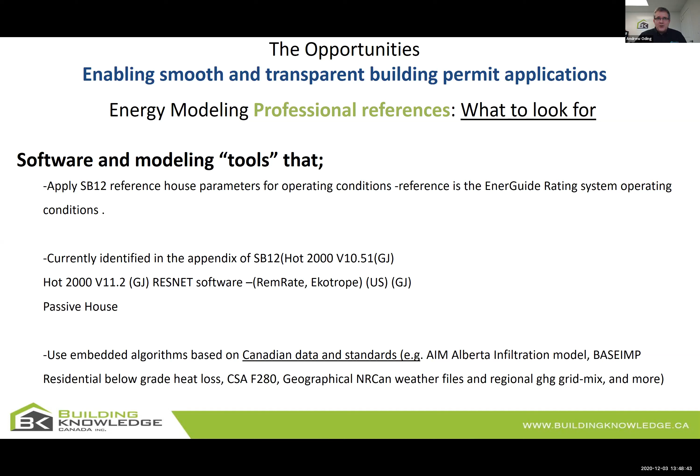I'm sure there's always going to be little notional differences that might benefit one technology or another. But at the end of the day, all modeling is not going to be perfect. Some is going to be helpful. Just make sure the professionals who are doing it are transparent, they're clear, they're helpful, and can work with the clients.

I do want to focus in a little bit too, because when it comes to meeting the building code with performance, in almost every case, you are going to be doing better than what's at the minimum code. And so we've developed a little bit of a package that can help some of our builders, understanding that your team's smart, you're using building science, your homeowners know you care. The reality is you're using Canadian building science and you can prove it.

The other thing too to understand is that our Home 360 supports and integrates directly with these recognized third-party programs. So depending on what you want to achieve at the end of the day, if you decide to look at some of these voluntary programs, this integrates very nicely into the Home 360.

We give them a report on all their sites, how it's performing. We like to meet with their site team, and it gives them some feedback on areas they can improve, but more importantly, it gives them feedback on where they're doing really, really well. And at the end of the day, it's all about improving the bottom line.

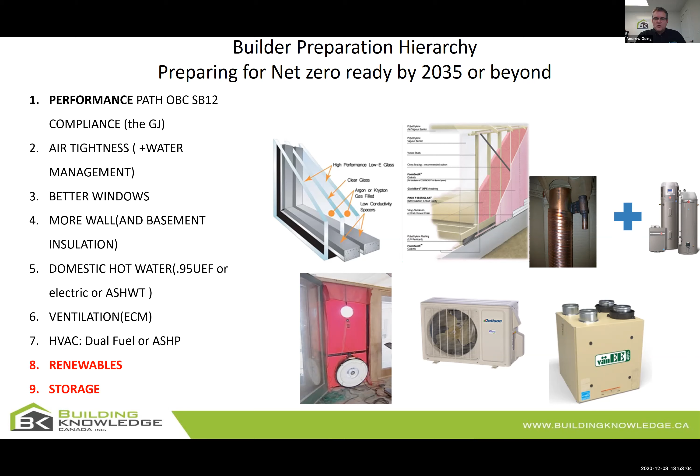Again, if you want to understand what your path ahead looks like, here's your cheat sheet. If you're starting to look at 1, 5, 10 years, the very first step towards the next 10 years is simply getting used to performance. And at the same time, you can reduce the cost associated with the construction of the home. After that, look at air tightness, then move to windows, then move to walls, and so on and so forth. So that's your first step. Get involved, move to continuous improvement, understand that you can build a better home for less cost.

I will tell you, as a former builder, that I actually don't know that I've ever seen a time like this when there's been such a compelling opportunity to build a better product for less cost. Rarely are we able to say that in this industry. Understand how close you are to things like Energy Star and net zero, thoughtfully understand where net zero is coming and when it's coming. Make sure that you're reinforcing your brand. And again, remember, the building science, your team is smart, your homeowners know you care, you can use Canadian world-class building science and you can prove it.